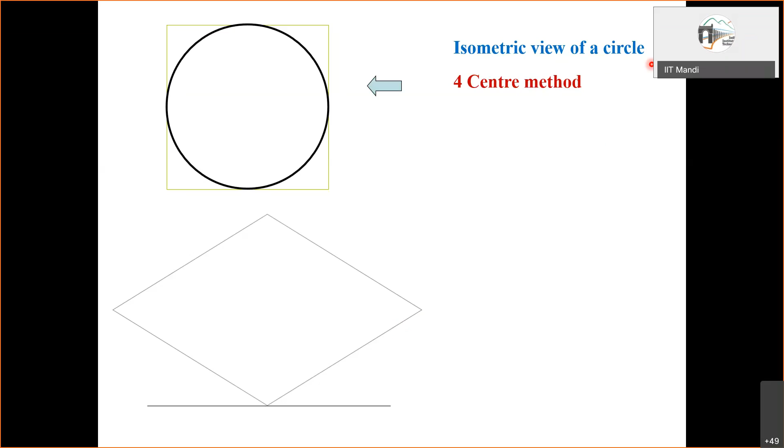Okay, so you see, yesterday we had discussed this, so I'll just go through it again in a bit fast manner, and then we'll proceed further. We had discussed this four center method, and as I had mentioned, this is an approximate method, but it's very fast. So it is very fast and it actually gives very good result. I mean, very nice diagram we can achieve with it.

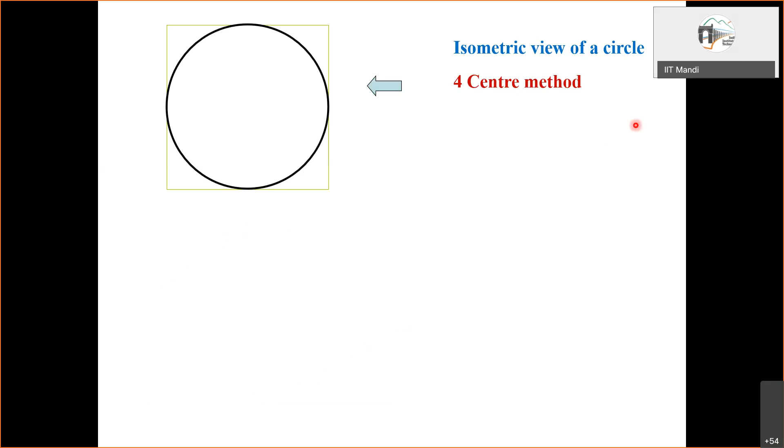So if we have a circle like it is shown over here, and then we have to obtain it in the isometric view, then what we need to do is that this circle we encompass within this square, which is shown here with the light green lines, right? So we encompass it within this square, and now it is easy to obtain this isometric view for the square. So when we consider it to be in the top view, then it will be like this. When we draw the top view for the square, it looks like a rhombus in this fashion. And thereafter we locate the four centers.

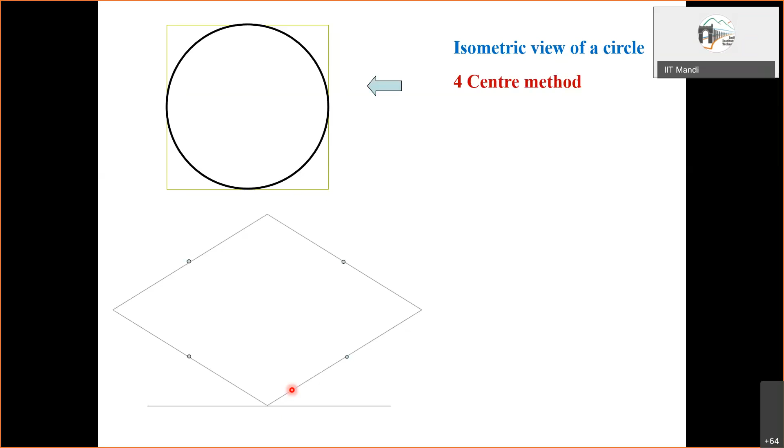So for that, first of all, we look at the midpoints in these all four lines, and then we join the corner at the obtuse angle, this one, with the midpoints A and B. Likewise, from this corner with D and C. Okay. So like this, we draw the line, and finally we can look at four centers, 1, 2, 3, 4. And then we have to draw the circular arcs from these. From center 1, the radius will become 1 to A or 1 to B, and we draw the arc. Then same thing is replicated from 2. From 3, the radius is 3 to A or 3 to D, and a smaller arc, and the same is

repeated at 4. And for the case when it's not considered to be top view, rather it is front view or side view, then we have a rhombus like this. Again, the midpoints located A, B, C, D, and then we join again from the corner having the obtuse angle. We actually join the other two midpoints, okay, and then we locate the four centers, 1, 2, 3, 4, and again similar to the previous case, we can draw the circular arcs and complete this.

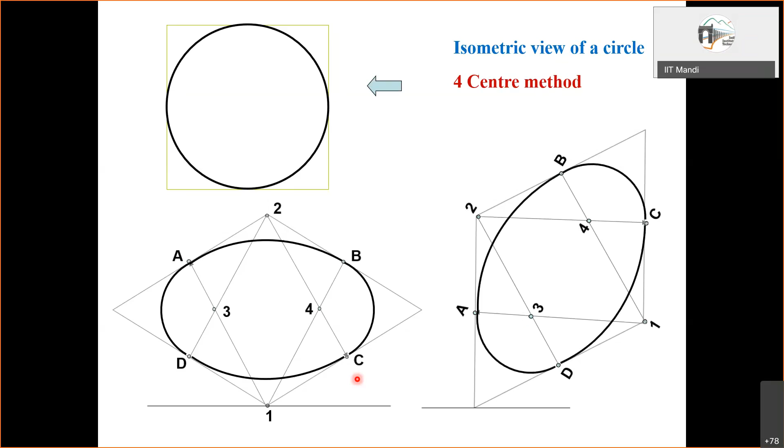Next, one more illustration based on this thing we can have a look at. So when say you don't need to draw the complete circle, only part of it is to be drawn, right? So like we take this case. So you have a circular arc here, and you have circular arc here. At those two locations we have the circular arcs. But of course it is only part of the circle, right? Rather it is quarter of a circle.

Now when we will draw the isometric view for this, then we have got straight lines. We have straight line here, here, and also at this place and at this place. At all these places we have the straight lines. Apart from that, this portion is joined with a circular arc, and this portion also joined with a circular arc. So this is what we have to reproduce. The straight lines, of course, we can draw easily because these will be all isometric lines. This is a rectangle which is being formed, right?

If we try to complete, you see here it's completed with the green lines. The same way here also it's completed. Finally, it is becoming a rectangle. So for the rectangle, all the sides will be isometric lines, and we can easily draw them in the isometric view. Then will remain the question of this arc. So for arc, you see a small square has been formed here and also here.

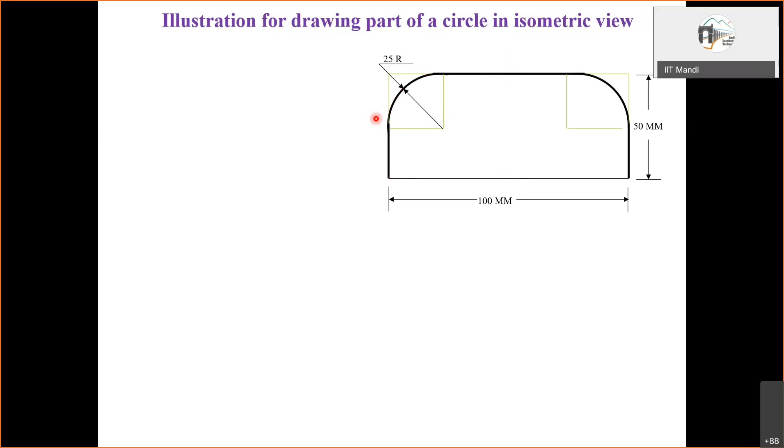Okay. So now let us have a look. So if it is considered to be the top view, we'll have the two isometric axes inclined 30 degree. Okay. One here, both inclined 30 degree. So the 100 mm length has been taken along this line. Okay.

Then we complete this rectangle, whatever has been drawn, and then we have to consider the square, right? If we consider this to be the complete circle, it will be something like this. You have to consider the square which will be encompassing this. So actually for this particular drawing, this is one square, this is another square. This square will serve the purpose for this, and of course, here these are two rhombuses. Two rhombus we are obtaining, not a square, but here it will be square.

So this one is for this one, and this one is for this. Okay. So now you see this part eventually will have to be drawn here, and here you have the acute angle. So with the four center method, what we do is we draw the four circular arcs. So only one arc will be sufficient to complete this arc, right? So here for the small arc, the center is to be located, and then we can draw it. So this is an obtuse angle corner.

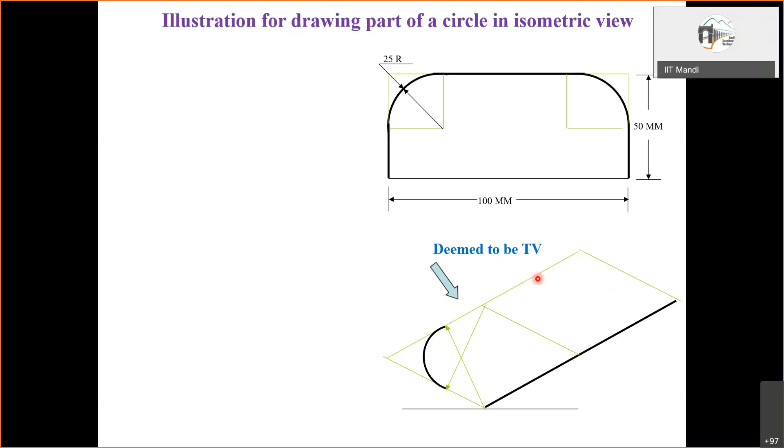And this is the obtuse angle corner. So you see this will become the center, this midpoint, this radius you measure, and you will have to draw it like this, right? So this is what we have to do from here, an arc with this. Okay. Then of course the rest of the parts are straight lines only and can be completed. Next we can proceed to the front view also. So that is now shown like this. Okay.

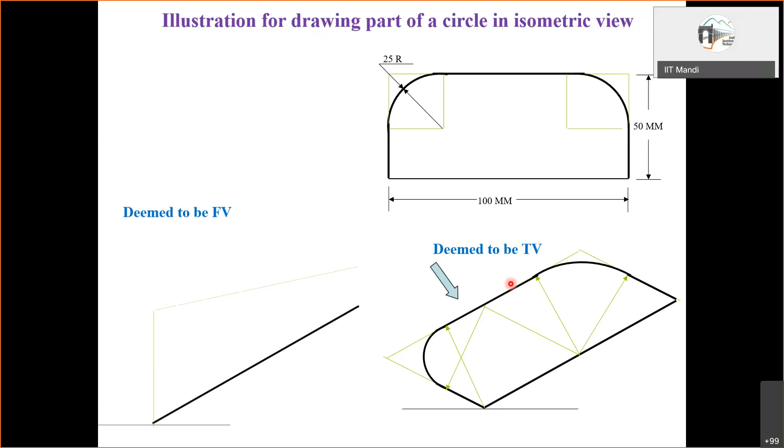Again the mid parts, so that we can have two rhombuses, the desired one. Now in this part, here you will have the bigger arc, here you will have the smaller arc, and as we have discussed, the same thing you need to do. Okay. So with this as the center, the bigger arc can be drawn from this point to this point.

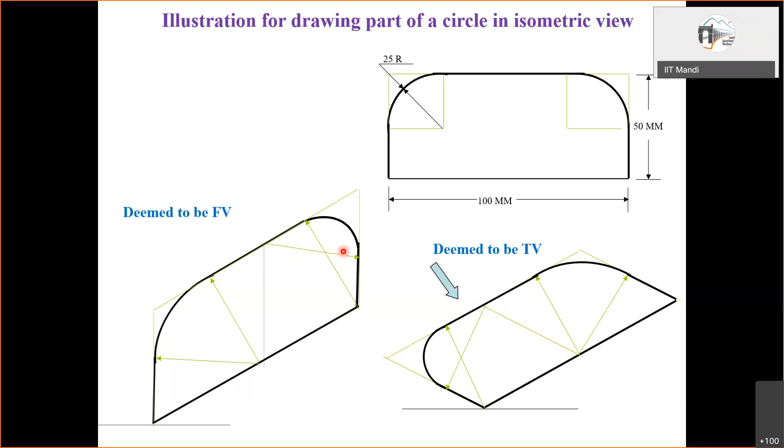And the next center is to be located, right? So from the obtuse angle side, one line, obtuse angle side, one line. This gives the center, and we draw the arc. So this is completed. Okay. Yeah, so this is when you have to draw the part circle. Sometimes you need to draw the semicircle, then you need two arcs. For these cases, it was only a quarter of a circle, so we only needed one arc to be drawn.

Then one or two cases we can just have a brief look at. So now suppose we have to draw the isometric view for a pentagonal pyramid, right? For this case, in general, you will have a top view and front view available to you. For this slide, I don't have that, but yeah, you have this available to you. Then how can we proceed?

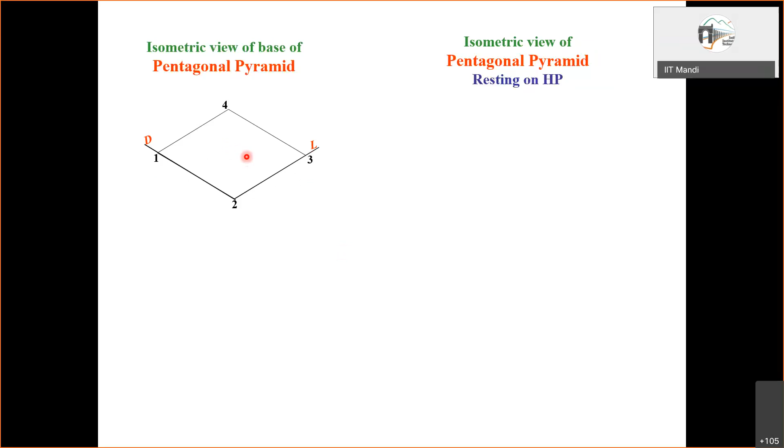We can discuss. So first of all, the top view configuration for the pentagon is to be achieved like this. By like this, what I mean is, first of all you will have to encompass the top view within a square. Then that square will look like a rhombus. So for the top view configuration, the rhombus will look the way it is shown in this diagram, right? So this rhombus you achieve, and then on the isometric lines, all the corners you will have to locate, and the pentagon can be obtained. So this will be the base for this pentagonal pyramid, right? So this base is drawn like this.

Okay. So you locate these two isometric lines, axes 30 degrees inclined to the horizontal axis because it is the top view configuration. Then you make this rhombus, you locate all the corners, okay, and then you can join all these points, okay. So that will give the base.

Now this pentagonal base is obtained, but now we have to obtain the height also. So whenever it is the case of a pyramid, we can locate the center here, and then from the center we can draw the vertical line with length equal to the height, okay. And of course, if it is an isometric projection, then you will have to obtain the corresponding reduced length as per the isometric scale. But anyways, with the given height, if we can locate the center, we can simply add the height over here. So that is what we need to do for the pyramids.

Okay, so we draw an isometric line, and on this, if we have the top view of the pentagonal pyramid, there you will already have the apex located at the geometric center of the pentagon. In the top view of the pentagonal pyramid, the apex will be located at the geometric center.

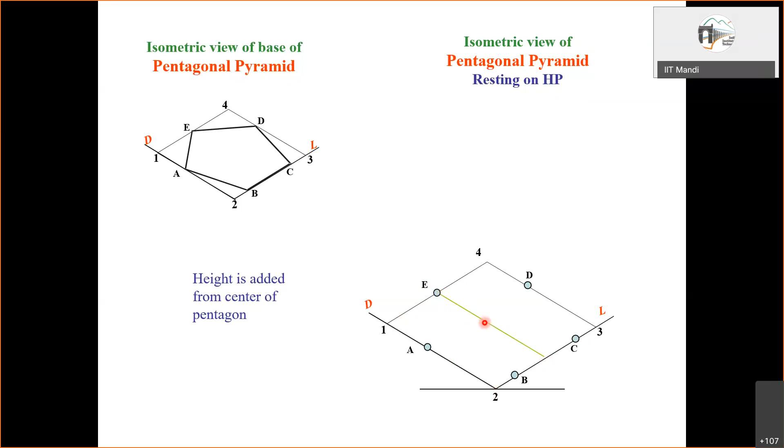Okay. Now the height of the pyramid can be added, and then you can join all the corners. One edge is a hidden edge here. If needed, in particular to depict it, it can be drawn. Generally, it can be escaped from drawing, right?

Now, after completing all these edges, we can remove the other construction part. So it will be like this. This D is there, but you don't need to show it. And in particular cases like this, we can show the hidden lines also if you want to, but in general it is not done. Okay, so this is the pentagonal pyramid.

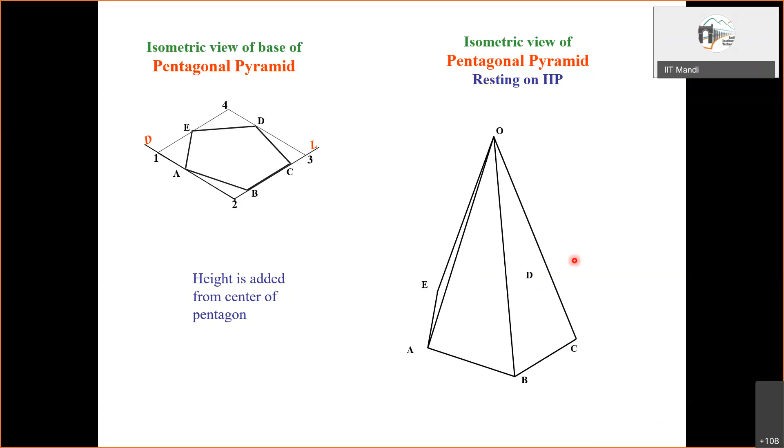Next, let us consider the frustum of a square pyramid. When you have a pyramid, the apex we located in the previous slide was directly above the geometric center. So first we located the geometric center in the previous slide, and for that we have to use the orthographic view. Using that, we locate the geometric center and then obtain the apex.

Now here we won't have a specific apex, rather we'll have the top surface for the frustum. If we have a frustum of a pyramid, then the top surface of this frustum will maintain exactly the same shape as the base, but the size will be reduced, right? So we'll have something like this, top view and front view for this pyramid.

So first of all, we can draw, in the top view configuration, the base of the pyramid, right? So we draw two axes inclined at 30 degrees with the horizontal, and then this square will be reproduced. Of course, this rhombus we have obtained for this square represents all the sides of the base. Now for the top part, the height is 60. So from all the corners we can obtain this height.

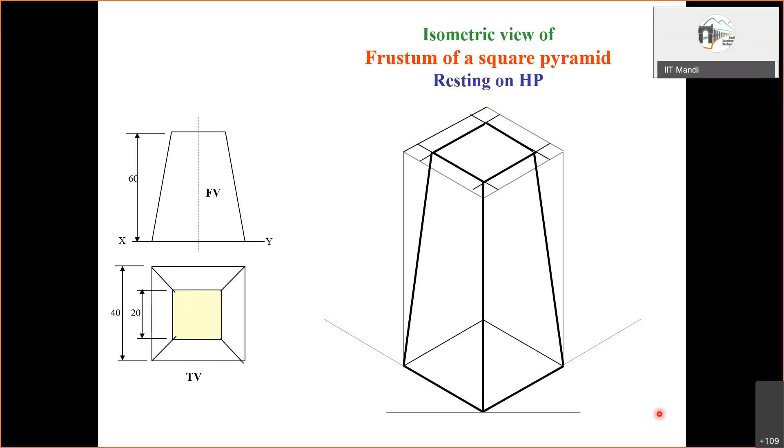But that is what in general is done. Construction lines are removed for isometric view in particular. Okay. Okay, sir. Now I talked about a special case, right? So this is the special case. In the first lecture, I was talking about the special case. So that special case is shown on this slide.

So what we have here, like we can see in this orthographic view, is this sphere. Here we have a sphere. We see a circle, but this is front view of a sphere. And then we see this. This is front view of a square plate. It is a plate which is a square in shape. We can call it a prism also, right? So it is a square prism with less height.

So on top of this square plate, a sphere has been placed. Okay. So when we have to draw its isometric projection, then its top view of course is not given in this, but as I'm saying that this is a square plate. So square plate will look like this, that you know, right? Part of it is hidden behind this sphere. Then this sphere has been placed over here. So drawing a square plate, of course, everyone will be doing 30-degree inclined lines. This distance is known, right?

So what is being done is, first of all, true lengths are drawn on this 45-degree line. Then those are brought onto this 30-degree inclined line. So you'll have the reduced length as per the isometric scale. 15 will become this much, right? Likewise, 25 will be from this point up to this, or 50 will be from this point up to this. So these dimensions have been mentioned as ISO 50, ISO 25, ISO 15 in this diagram.

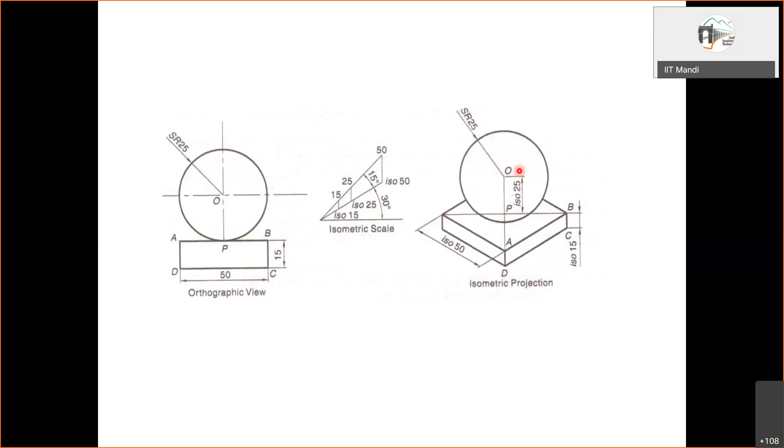So now this 25 will get enhanced by some amount, and when we draw with this enhanced radius, the exact view as per the isometric projection can be achieved for this drawing also. So this was a particular case where if we draw the isometric view, an error creeps in, and that is how we avoid it, right?